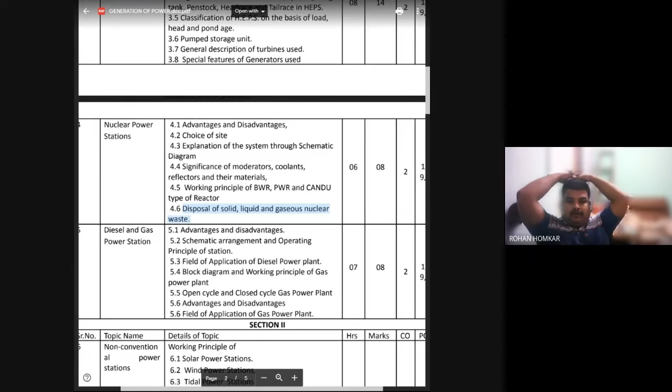Now when we talk about any power station, in a thermal power plant there is coal which is burning, and after the coal is burned there is formation of ash which needs to be disposed of. Similarly, we need some mechanism to dispose the solid, liquid and gaseous radioactive nuclear waste. We need to dispose it off, and for that purpose we require a specialized mechanism. Otherwise, though that material is not useful for generating electricity, it will be harmful for people, animals, environment, trees, basically the ecosystem and water system. All these things can be affected because of nuclear waste.

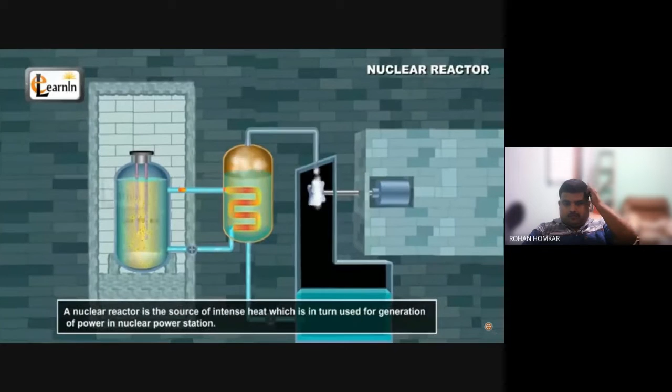In this video, we're going to learn about the nuclear reactor. Nuclear reactors are modern-day devices extensively used for power generation, as traditional fossil fuels like coal are at the brink of extinction. A nuclear reactor is the source of intense heat, which is used for generation of power in nuclear power stations. Its mechanism is similar to that of a furnace in a steam generator, and the steam drives the turbines of the electric generator system.

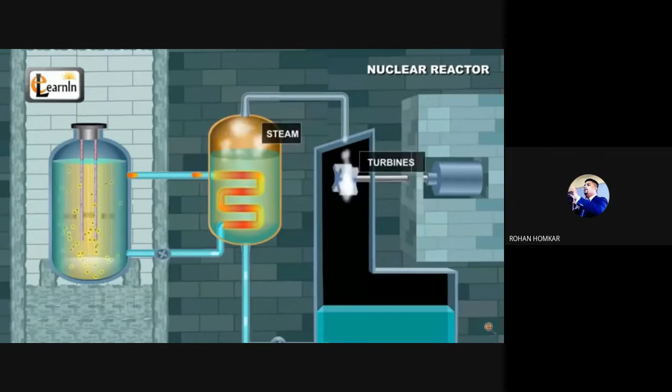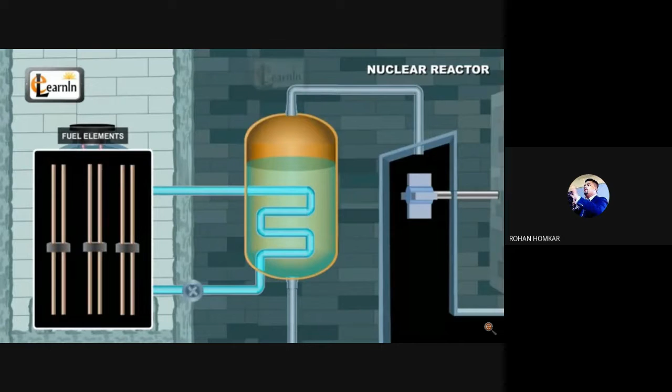A nuclear reactor consists of 3 crucial components: fuel elements, moderator, and control rods. Fuel elements come usually in the shape of thin rods of about 1 centimeter in diameter and contain fissionable nuclei like uranium-235 or uranium-238. These rods vary in number according to the size of the reactor. In large power reactors, thousands of fuel elements are placed close to each other, and this region is called the reactor core.

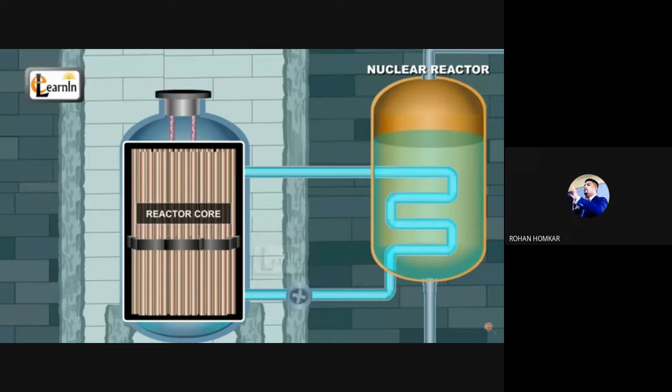These fuel elements are normally immersed in water, which acts as a moderator. The objective of a moderator is to slow down the high energy neutrons in a nuclear reactor, which are produced during the nuclear fission process by the fuel elements. Thermal neutrons, with energy of about 0.04 electron volts, are capable of producing fission reaction with uranium-235. During the fission reaction process, new neutrons are given out with energies of about 1 MeV, which is 1 mega electron volt.

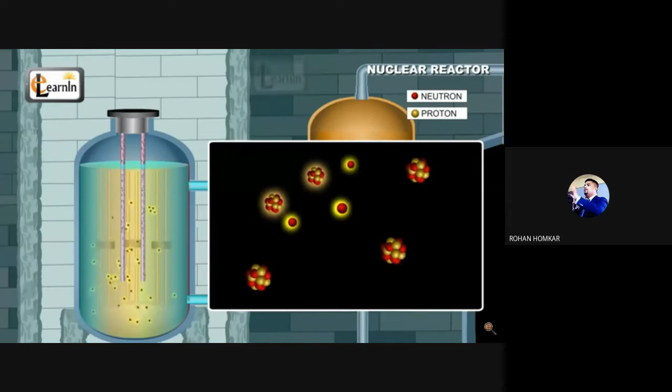These neutrons typically escape from participating in another fission process, as they are accompanied by enormous energy release. In fact, the probability of these neutrons producing another fission reaction is 500 times less than that of a thermal neutron. This is where a moderator is extremely useful. Moderators have the capability to slow down, or moderate, the speeds of these high-energy neutrons so that they can be used for a chain reaction to trigger multiple fission reactions of other uranium-235 nuclei.

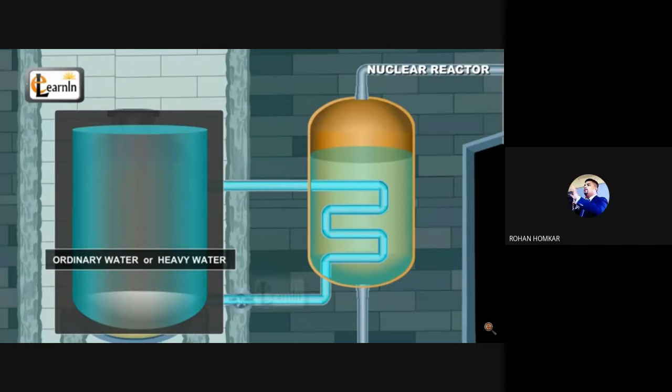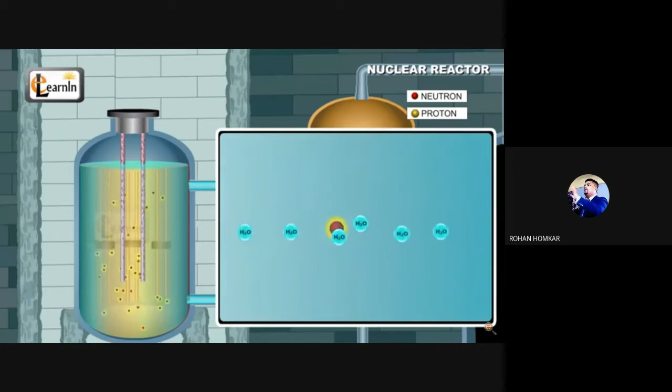Commonly, ordinary or heavy water is used as a moderator in nuclear reactors because of the deuterons present in them, which are capable of slowing down the neutron's speed. Water molecules in the moderator slow down the high-energy neutrons which leave the fuel element after nuclear fission, by colliding with them and causing them to lose energy with every collision. A new fission reaction can now be triggered using this slow neutron by striking it with a fuel element. The third and most prominent part of a nuclear reactor are the control rods.

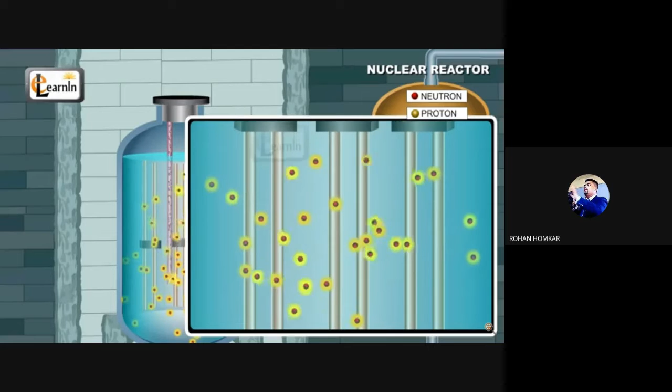In order to get a steady output of energy from the nuclear reactor, every single fission reaction should trigger another fission reaction and ensure the availability of spare neutrons released to trigger the chain reaction. By controlling the number of spare neutrons available at any given time, the rate of nuclear fission chain reactions can be controlled. This control on the fission reaction can be maintained using control rods.

The main function of the control rods is to absorb any excess or spare neutron in the moderator in order to prevent any further fission reaction. Usually, such control rods are made of boron or cadmium. To increase the rate of fission reactions, these rods can be removed from the moderator. A steady output of energy can thus be maintained by inserting or removing the control rods in the nuclear reactor.

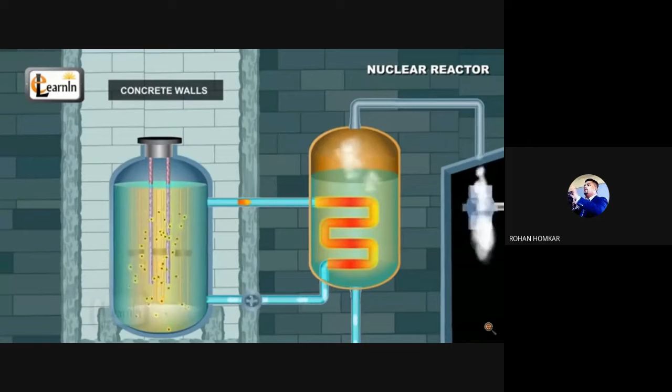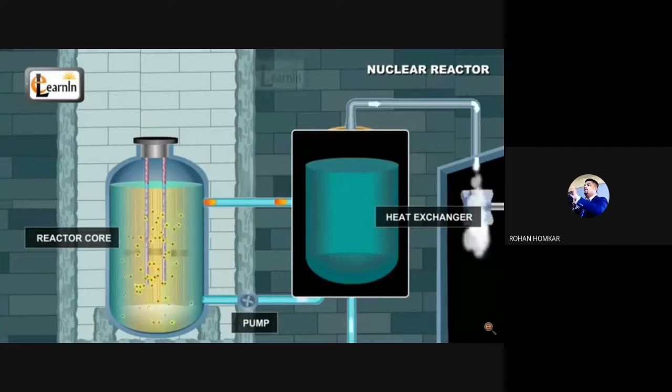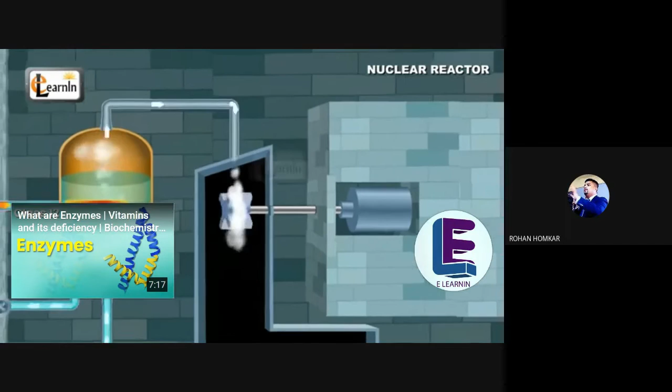The water changes to steam, which is in turn used to turn the turbines. So huge heat energy gets converted into electrical energy. Water is continuously flown in and out of the nuclear reactor using the pump. So a nuclear reactor successfully generates nuclear energy from fission reactions.

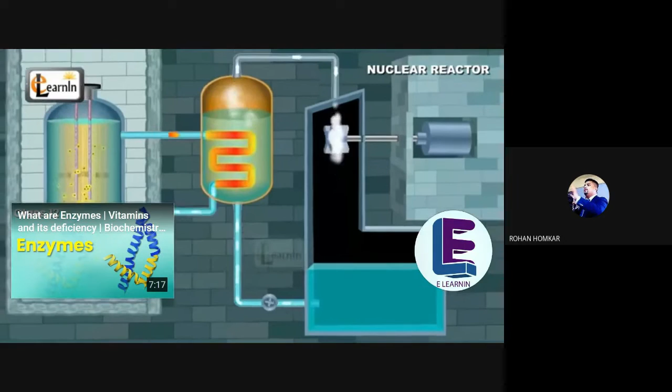Okay, so now you have come to know about what are the different structures, what are the different components in the nuclear power station. We will see how exactly this nuclear power station is working, and then we are going with the step-by-step points related in our syllabus.

Have you ever been in an argument about nuclear power? We have, and we found it frustrating and confusing. So let's try and get to grips with this topic.

It all started in the 1950s. After the shock and horror of the war and the use of the atomic bomb, nuclear energy promised to be a peaceful spin-off of the new technology, helping the world get back on its feet. Everyone's imagination was running wild. Would electricity become free? Could nuclear power help settle the Antarctic? Would there be nuclear-powered cars, planes, or houses? It seemed that this was just a few years of hard work away. One thing was certain, the future was atomic.

Just a few years later, there was a sort of atomic age hangover. As it turned out, nuclear power was very complicated and very expensive. Turning physics into engineering was easy on paper, but hard in real life. Also, private companies thought that nuclear power was much too risky as an investment. Most of them would much rather stick with gas, coal, and oil.

But there were many people who didn't just want to abandon the promise of the atomic age: an exciting new technology, the prospect of enormously cheap electricity, the prospect of being independent of oil and gas imports, and in some cases, a secret desire to possess atomic weapons provided a strong motivation to keep going.

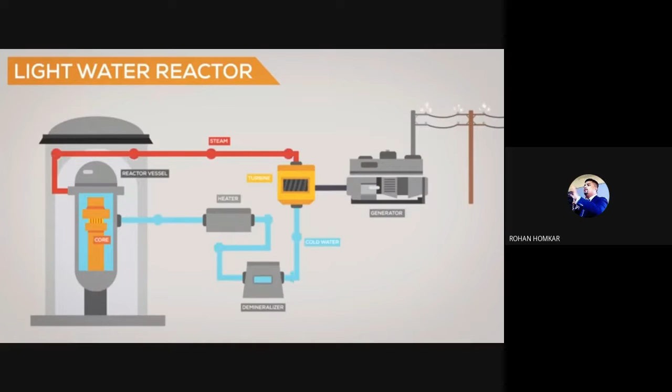Simple, ordinary water does the job, which is very practical since water is used to drive the turbines anyway. The light water reactor became prevalent because it's simple and cheap. However, it's neither the safest, most efficient, nor technically elegant nuclear reactor.

The renewed nuclear hype lasted barely a decade though. In 1979, the 3 Mile Island nuclear plant in Pennsylvania barely escaped a catastrophe when its core melted. In 1986, the Chernobyl catastrophe directly threatened Central Europe with a radioactive cloud, and in 2011, the drawn-out Fukushima disaster sparked new discussions and concerns.

While in the 1980s, 218 new nuclear power reactors went live, their number and nuclear's global share of electricity production has stagnated since the end of the 80s. So what's the situation today?

Today, nuclear energy meets around 10% of the world's energy demand. There are about 439 nuclear reactors in 31 countries. About 70 new reactors are under construction in 2015, most of them in countries which are growing quickly. All in all, 160 new reactors are planned worldwide.

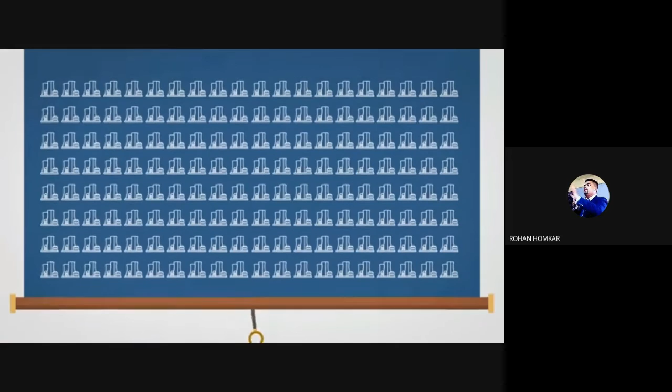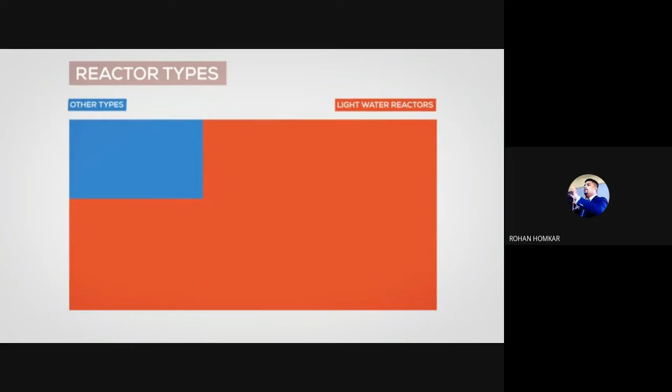Most nuclear reactors were built more than 25 years ago with pretty old technology. More than 80% are various types of light water reactor. Today, many countries are faced with a choice: the expensive replacement of the aging reactors, possibly with more efficient but less tested models, or a move away from nuclear power towards newer or older technology with different cost and environmental impacts. So, should we use nuclear energy?

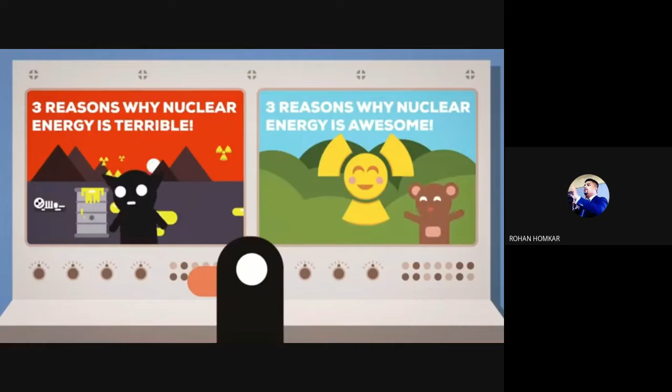The cons of using nuclear energy. 1. Nuclear weapons proliferation. Nuclear technology made a violent entrance onto the world stage. Just 1 month after the world's first ever nuclear test explosion in 1945, 2 large cities were destroyed by just 2 single bombs. After that, reactor technology slowly evolved as a means of generating electricity, but it's always been intimately connected with nuclear weapons technology.

It's nearly impossible to develop nuclear weapons without access to reactor technology. In fact, the Nuclear Non-Proliferation Treaty serves the purpose of spreading nuclear reactor technology without spreading nuclear weapons, with limited success. In 40 years, 5 countries have developed their own weapons with the help of reactor technology. The fact of the matter is that it can be very hard to distinguish a covert nuclear weapons program from the peaceful use of nuclear energy.

In the 1970s, the big nuclear powers were happily selling peaceful technology to smaller countries, which then developed weapons of their own. The road to deadly nuclear weapons is always paved with peaceful reactors.

2. Nuclear waste and pollution. Spent nuclear fuel is not only radioactive, but also contains extremely poisonous chemical elements like plutonium. It loses its harmfulness only slowly over several tens of thousands of years. And there is also a process called reprocessing, which means the extraction of plutonium from spent nuclear fuel. It can be used for two purposes: to build nuclear weapons or to use it as new fuel. But hardly any of it is used as fuel because we don't have the right kind of reactors for that.

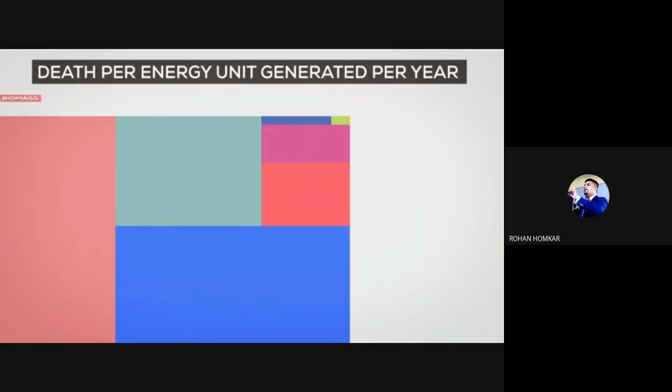While nuclear waste is really toxic, it's usually stored somewhere, while the toxic byproducts of fossil fuels are pumped into the air we breathe every day. So, just by reducing the amount of fossil fuels burned, countless cases of cancer or lung disease and accidents in coal mines have been avoided. If we can choose between lots of dangerous stuff being put into a deep hole and lots and lots of dangerous stuff being pumped into the atmosphere, the former seems more logical. Nuclear energy feels way more dangerous though. Single catastrophic events burn into our memory, while coal and oil kill silently. It's like the death rate of flying versus driving.

Even in the best case scenario, it would take at least 40 years to switch to 100% renewable energy. So for as long as we continue using fossil fuels, nuclear energy will save way more lives than it destroys.

2. Nuclear energy reduces CO2 emissions. Nuclear energy is arguably way less harmful to the environment in terms of climate change than fossil fuels, our main source of energy. Since 1971, about 64 gigatons of greenhouse gas emissions have not been pumped out thanks to nuclear energy. And by the mid-21st century, that could amount to an additional 80 to 240 gigatons.

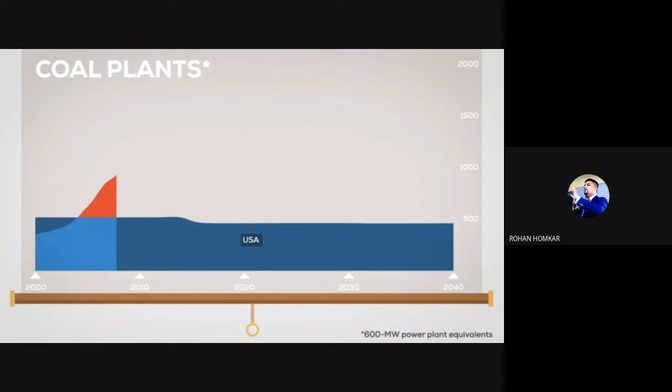Humanity's energy consumption is rising steadily. According to US government projections, China alone will add the equivalent of a new 600 megawatt coal plant every 10 days for the next 10 years. China already burns 4 billion tons of coal each year. Coal is cheap, relatively abundant, and easy to get to, so it's not likely that humanity will stop using it soon. Nuclear energy might be the only way of dampening the effects of climate change and preventing a catastrophic man-made global warming. Compared to the other things we do, nuclear energy is relatively clean.

So even if it is a good idea to quit nuclear energy long-term, it might be a good solution for the next 100 years or so compared to the alternatives.

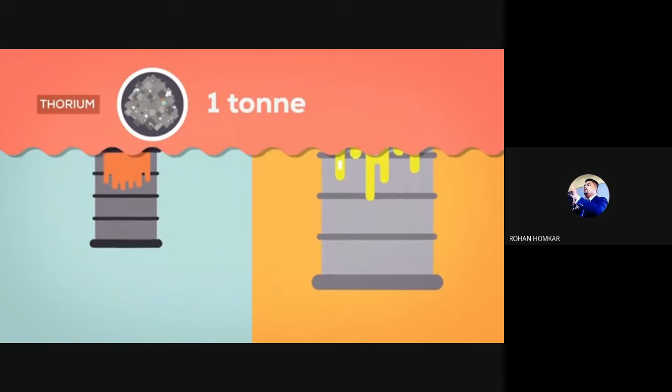3. New technologies. Maybe technology will solve the problem of nuclear waste and dangerous power plants. The nuclear reactors we've used so far are mostly outdated technology because nuclear innovation stopped in the 1970s. There are models like the thorium reactor that could solve the problem altogether. Thorium is abundant, really hard to turn into nuclear weapons, and up to 2 orders of magnitude less wasteful than current nuclear reactors. The waste material might also be only dangerous for a few hundred years, in contrast to a couple of thousand years. 1 ton of thorium is estimated to provide the same amount of energy as 200 tons of uranium or 3.5 million tons of coal.

So while we cannot know for sure if alternative nuclear technology will keep its promises, shouldn't we at least do more research before we forego an opportunity to solve lots of humanity's current problems? It might not be an easy challenge, but that hasn't stopped us before.

So, should we use nuclear energy? There are risks involved in any great human endeavor, and we have to make an informed decision rather than rely on gut feeling.

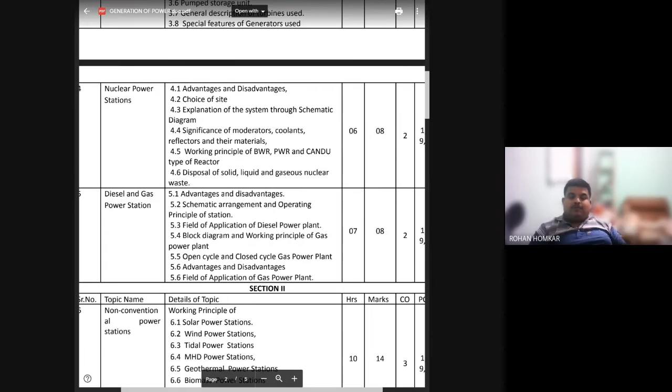We need very efficient manpower as well as very high technology. That technology will help create a proper flow of energy from the uranium atoms and the radioactive chain reaction, and then installation of different barriers and structures for preventing contamination, which is again very important. High technology is required for erection and commissioning of a nuclear power station.

This is one way you can say is a disadvantage of our nuclear power station. Also, we can say that the capital cost required at the starting and initial stages is very high. If you want to install a hydro power station, you need to construct a dam, or use a ready-made dam which is available. But if you want to install a nuclear power station, you require a large amount of money or capital so that its mechanism, structure, and technology can be well paid off.

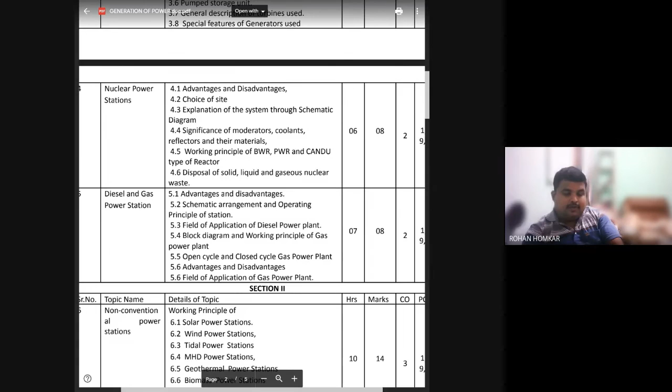And for that purpose you can say this type of unit involves a lot of difficulty. So cost is again a very important point to understand.

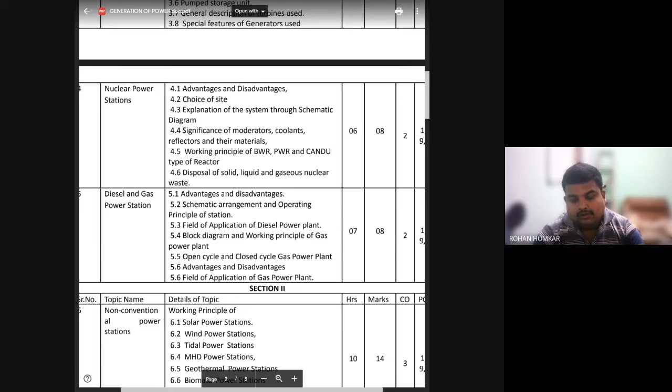Okay, now we will see how the site selection criteria works for our nuclear power station, we will see this now. I hope your paper and pen are ready, you are taking down notes, and there are some 41 students listening right now. Now for first selection, we need to see what facilities should be there at the site.

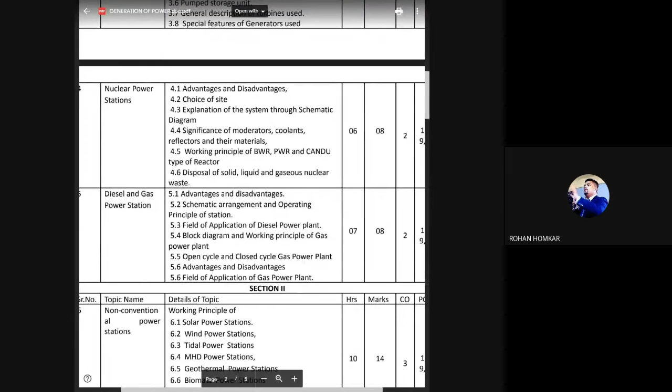The heat exchanger is basically taking heat from the nuclear reactor, and then the water is converted into steam. That steam is impinged on the steam turbine, and the turbine rotates. This rotating turbine is generating electricity with the alternator, so the turbine is acting as a prime mover.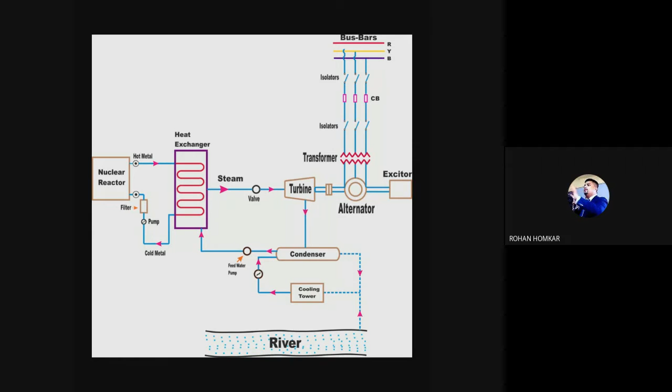So moving ahead with this, I will give you some time for drawing this diagram in your notebook. Once you're done with it, just type done in the chat box. Draw it properly and sincerely. I hope it is visible to everyone and you are done with the drawing.

You can zoom in on your phone too, I think. Is it possible for you to zoom in on your screen?

Okay, so now I hope you are done with the diagram, so now moving ahead with this. In this particular diagram, we are seeing the schematic diagram of nuclear power station, which is a very basic thing, because here the diagram is not giving you details of the reactor.

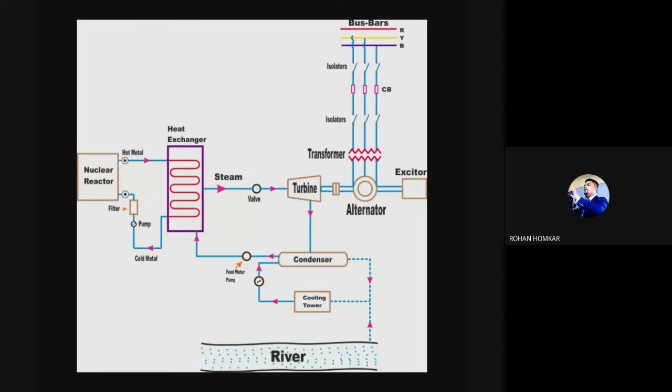Hello, am I audible to you? Hello. Okay, so there is some network glitch at my area.

So the point we are discussing is control rods. Control rods are used to stop the reaction, and they have a very high capacity to absorb the neutrons. Now we'll see a video about how the Tarapur Nuclear Power Station is working, and let's explore the things.

Nuclear plant. It's a place very few people have access to. For the first time, a camera crew will cross the lines of its forbidden boundaries to enter an exclusive territory, to get a glimpse of a world rarely seen. This is as close to the actual reactor as you can possibly get. This is an insight into what goes on behind the walls of a nuclear power reactor. What you're carrying is 1 million units of electricity. An insight into the complexities of how things work. This is probably the most futuristic thing I've seen outside of science fiction films. This is Tarapur Nuclear Power Plant, unlocking power.

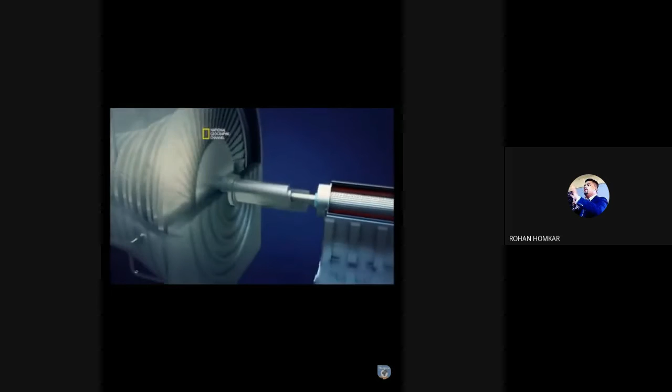While nuclear energy is produced in the reactor, everything is controlled in what is perhaps the most important room in the plant, the control room. It is the hub of a live 24-hour production of nuclear power, manned by personnel working around the clock. I'm inside the nerve center of the nuclear plant, the control room, where every minute detail of the plant is monitored with extreme precision.

These are probably the most fascinating screens in the control room. This is the very heart of the nuclear reactor. Basically, these screens monitor the amount of energy generated by the reactor and the amount of energy extracted. It's critical to get the balance right. These numerous parameters are meant for the safe operation of the plant. If anything were to go wrong, the reactor would lose 0.5% of its power per second, and in about 3.5 minutes the entire system would shut down.

The highly skilled and trained personnel in this control room keep a hawk's eye on all monitors and are responsible for making sure the parameters are under control. I take care of more than 20,000 plus parameters of the plant. They should be within limits, so every time I have to be vigilant and take care of those parameters. After all, people's safety is in our hands only.

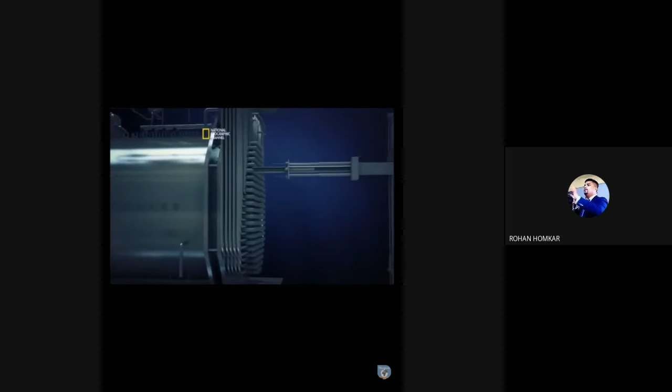And on the opposite side, a similar robotic arm takes out the spent fuel bundle. So currently it's refueling time. Let's find out about the process here.

Could you tell us about the refueling process, and how often do you do it? Total we have 392 channels. Out of these, per day we carry out refueling of 2 to 3 channels. For this we have two machines, one on the north side of the calandria, another on the south side. We take out these machines from their park position to the channel position.

We align these machines to the channel with our high precision sensor. After aligning, we clamp this machine on the channel. We open up the boundary of the channel. We push the new fuel bundle from one side. Suppose I am starting my refueling from the north side, so I'll push new fuel bundles from the north side, and I'll extract the spent fuel bundle from the south side of the machine. This way we complete our refueling.

And all that is monitored from here? All the parameters are remotely monitored here, and this whole operation is carried out using a microcomputer, so in totally automatic mode this refueling is being done. All the feedbacks are available on this panel, both in the computer and in these indications, available to the panel operator.

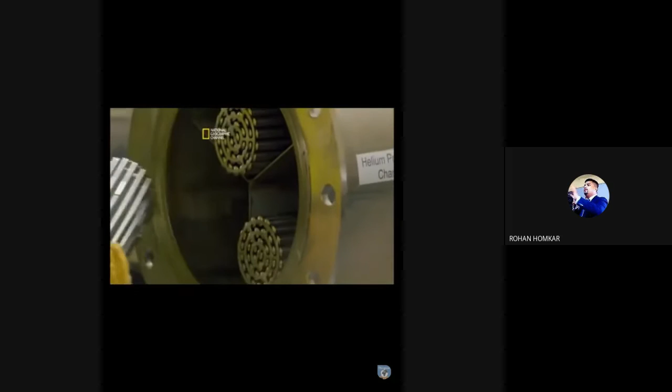After doing the visual and the dimensional checks, we put three bundles individually in one bombing chamber. After covering it, we pressurize it with helium gas up to 6 kg for 1 hour. The helium test is used to detect leaks. Once the new fuel bundle passes it, it is good enough to be loaded into the calandria.

Now we are inside this new fuel loading area. It's also one of the critical areas, and from here we will load the fuel manually, and then it goes ahead. After that this fuel is all through a system driven process.

Is it safe for me to handle it? Yeah, the new fuel is not a problem, it's visitor friendly, so there's no issue. So I will just lift one of these bundles. It's a bit heavy, and we just have to put it here.

The fuel goes in pairs. So would you like to load the other one? Sure, why not?

Now what you are carrying is 1 million units of electricity, this one fuel bundle. 1 million? 1 million units of electricity. It's heavy, but you are able to lift it quite comfortably. Not that easy. From here onwards the hydraulic ram will advance, and then the fuel goes into this new fuel magazine, and then again the transfer system, the fueling machine, which we'll be seeing next. So now we have loaded together, both of us have loaded 2 million units. 2 million units. Let there be light.

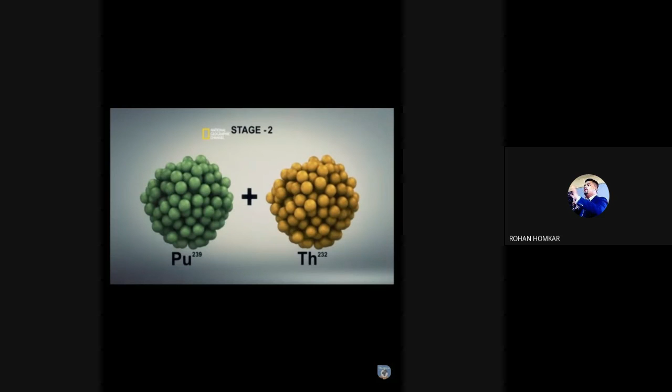In stage 2, plutonium-239 with thorium will be used as fuel to generate electricity, and in addition, U-233 will be generated. In stage 3, uranium-233 with thorium will be used as fuel to produce power, as well as more uranium-233.

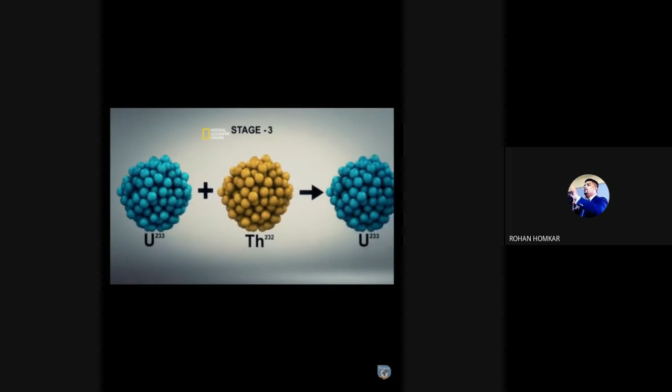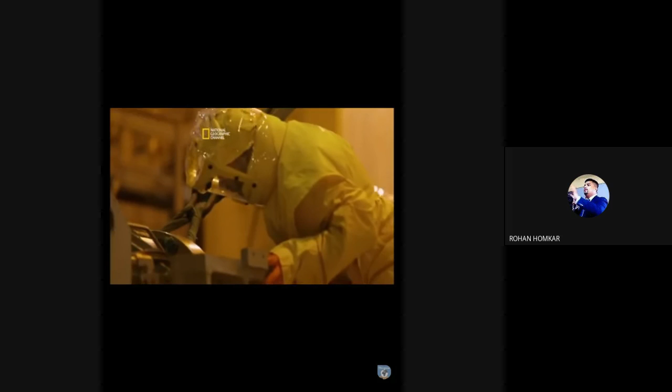One of the key things about nuclear power generation is that the plant can be kept running continuously, and power is produced without any interruption. To keep the plant running successfully, maintenance of the equipment is an integral part.

Nuclear energy and safety go hand in hand. Regular checks and maintenance are an integral part of the operations. Right now, I'm going to join a team that is getting ready for the action.

Could you tell us what is happening in terms of maintenance today? This is our fuel handling maintenance shop. If you really want to see how we carry out the maintenance, then we have taken up one major maintenance job inside the reactor building, Unit 4. So if you would like to go, I will take you there.

But I've just come from Zone 4, and could you tell me how you would measure my exposure to this radioactivity, if there was any? Yeah, there are two personal monitors we give to you, this is called TLD, and this is the direct reading dosimeter. So you can see that while taking the meter given to you, it was at 0, and now you can see the final reading is 2.33 microsievert.

This is the dose you have received for today, in microsievert. That is the dose you have received. But this is recorded here also, and similarly, every day you will be taking this when you take a job.

You might have taken an RWP for working, and every day this dose will be added to your TLD number in our software program. So at the end of the month, we will send this for reading. Whatever the dose registers, that is called the legal dose.